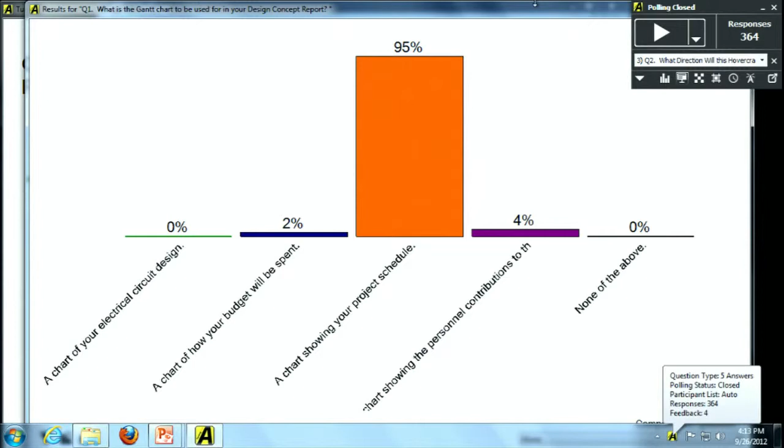Okay, first clicker question of the day. So, once again, to try to reward those who have actually been reviewing the notes from the previous lecture. What is a Gantt chart for? More particularly, how are you expected to use it in your design concept report, which is going to be due pretty soon? Yes. Yeah, I'll say that out loud. Okay, couple seconds left. All right, good. Wow, it was either easy or everyone reviewed.

Okay, so just to reiterate, a Gantt chart is actually a pretty powerful tool, and in the fields of engineering you are most likely going to be using more Gantt charts than you know what to do with. Most modern industry and businesses use Gantt charts to help projects stay on track. They help plan not only where the effort is going, but you can also make the Gantt charts much more complicated, where it's not only human resources that are tracked, it's financial resources, it's access to testing facilities and things like that. And it helps an organization stay on track as best as they can.

So there are much more sophisticated tools to make Gantt charts than you're going to use in this class. Most of you are probably going to use Microsoft Excel to make Gantt charts. And I put a couple videos on the website that'll walk you through how to do that in different versions of Excel. And you can find many more on YouTube. But if you're really interested in learning how to do this well, and you might do this by the time you get to your senior design projects, there's a software package called Microsoft Project that specializes in making really detailed Gantt charts that you can take a look at.

We don't expect that you use that in this course, but everyone in the College of Engineering has access to free copies of a lot of Microsoft software. I mentioned that several weeks ago. Microsoft Project is one of them. It's like a $500 software package. You guys can get it for free. You can check out the instructions that I sent out in a course announcement maybe 3-4 weeks ago. And it's got a little bit of a learning curve, but it's quite powerful.

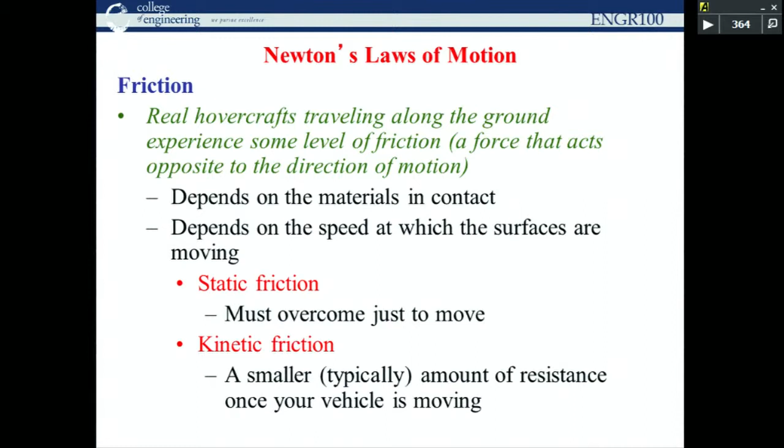And these are phenomena, issues that you're going to have to deal with when you're working on your control system. Friction can be good and friction can be bad. It all depends on what part of your system you're trying to deal with it. So you as a team have to figure out how serious it is. Is it really a problem? And in some cases, it might actually be desirable.

Because we don't allow you to use flexible skirts, it's probably not going to be a big problem as long as you're actually hovering. Probably not going to be a big problem on dragging on the ground. If you're dragging on the ground, you're disqualified, right? So obviously, you have to design around that whole situation.

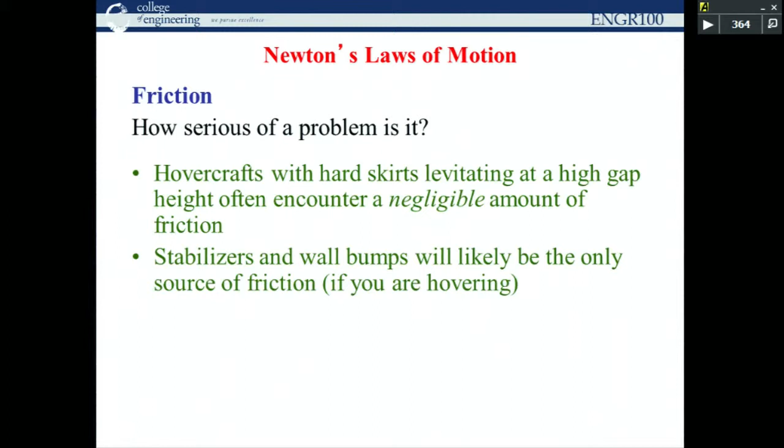Okay? The only way you're going to be able to figure out whether you have a friction issue anywhere on your hovercraft, on the top, dragging on the bottom, with your wheels, or if you have wheels to help keep you tracking in a straight line, is by testing it. And you won't be able to do this until you have something to test. So you have to build something, get yourself started, and get a feel for how much friction you actually have in your own hovercraft.

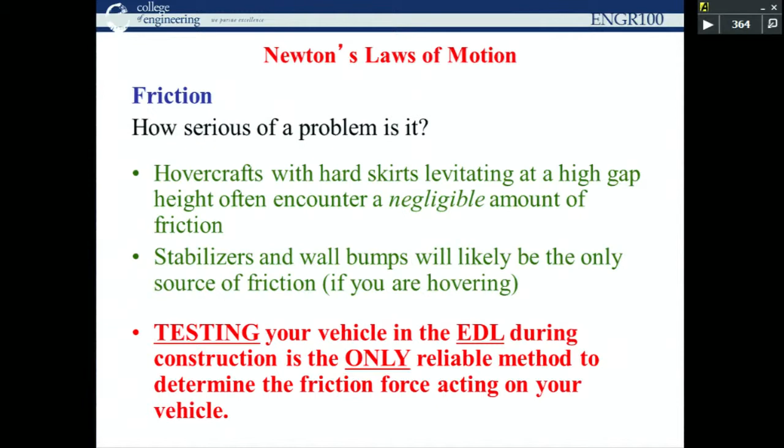Some hovercrafts, this is a zero issue. And in other people's hovercrafts, because of the design that they chose, they did have to spend quite a bit of energy or time thinking about how they're going to solve these problems.

Other classical problems we typically have are spinning. Now, this isn't a physics class, but you might imagine if you have a hovercraft here with fans that are pointing straight down, the moment you turn those fans on, they're going to start rotating, right? And if this thing is hovering, there's essentially no friction between your hovercraft and the ground. And you have a rotating fan on it.

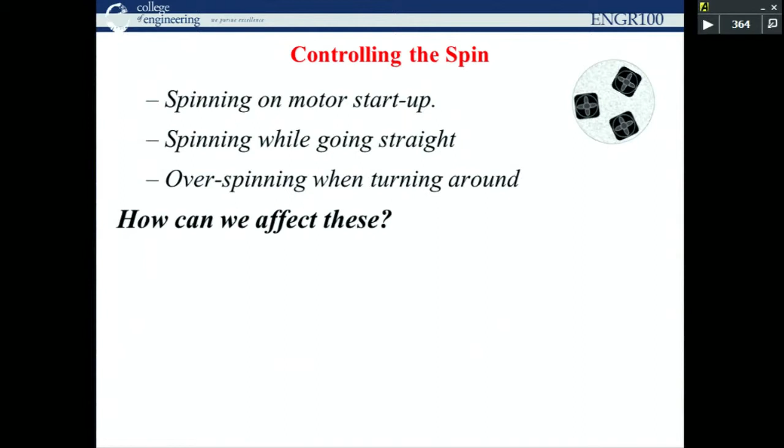What's going to happen is while the fan starts to turn clockwise, the whole rest of the hovercraft is going to want to turn counterclockwise, right? This is Newton's laws applied in an angular momentum sense. So the spinning of hovercrafts is a big issue that you have to come to some sort of a solution for. And how you achieve this is going to vary from team to team. Some teams will buy special fans that actually have two parts that rotate in opposite directions. So in other words, they have two fans stacked one on top of each other.

You have to look for these carefully if you want to buy them. The top fan rotates counterclockwise, the bottom one rotates in the opposite direction, and they cancel each other out, and the rest of the hovercraft doesn't rotate at all. Okay? Some fancy helicopters use these types of stabilization techniques. Most of them use tail rotors, but some helicopters will do this kind of a thing.

It is a particularly big problem if your hovercraft develops spin. It doesn't even have to be anywhere near this much spin. It only needs a little bit of spin because you're driving down this course that takes you 10 seconds to go down, right? And if you only have a slight spin, as you go down the field, suddenly your tail is spinning out, right? And you no longer are driving in a straight line down the course. Now you're driving into the sidewall. And once you hit that sidewall, then there's friction. And that friction gets you spinning really big time, okay?

These are fairly significant challenges. You don't want to spin. Some of you might have designs that go down to the other end of the field and then do a 180 and then drive back in the other direction. Then spinning is actually desirable if that's your design, okay? But you want to make sure you turn 180 degrees and not 160 degrees, right? Or 140 degrees or whatever.

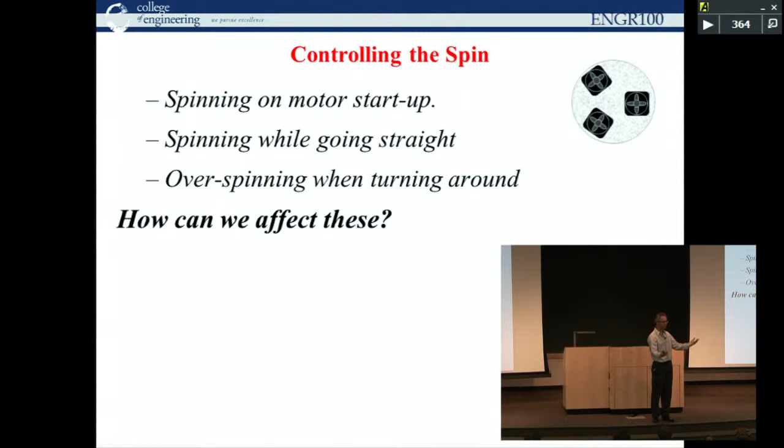The things that you can do to help address the spinning, either to cancel it out so that you don't have any, or to take advantage of it because you need it to actually turn around and go in the other direction, are everything from the balance of your overall hovercraft; where the fans are placed and how many you have can sometimes influence it. If you have one, it's easy to put it on the center line. If you've got 3 or 4 fans, you might need to find the sweet spots where you put them so that it's not only balanced for the mass, but it's also set up in a way that the moments, and when you take dynamics, you'll learn about the details of this, but the moments created by the fans are all equidistant from the center of rotation of your system, and hopefully can cancel each other out.

Right? The venting of the air underneath your plenum chamber can influence spinning. If you're not careful, it can be in a little exhaust port that gets you spinning really good, like a pinwheel. All right? Let's see here. Stabilizers, steering fans. These are other, a little bit more exotic. Most people use these approaches to actually manage their spin. Some people will put rotors on the back end that help stabilize them, but that's a pretty complicated solution. They basically make their hovercraft stabilize the way a helicopter gets stabilized.

I don't know if you ever thought about the complexities of a helicopter, but if they didn't have the tail rotor here, the rotation of the main rotors would cause a reaction of the whole body of the helicopter to rotate in the opposite direction. And that's a pretty sure way to get really dizzy and then die. So they put a tail rotor on the back end that causes the rear end to get pulled in the direction that's opposite to the direction that the main rotor wants to force the whole thing to rotate. Okay? It's a fairly delicate balance. You have to make sure that your tail rotor is turning at just the right speed.

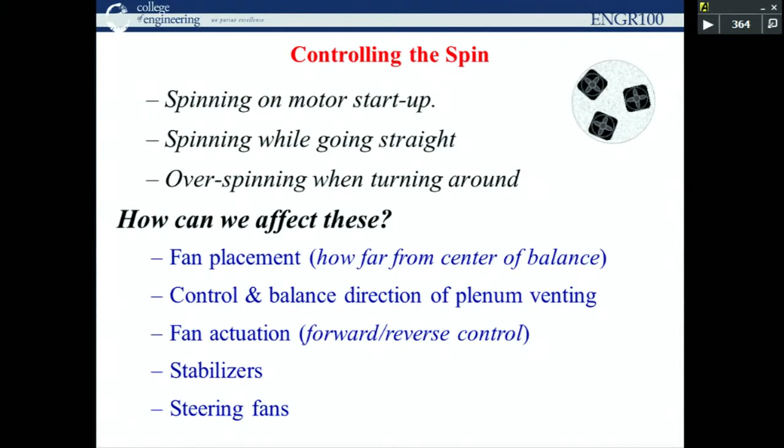Ducting sometimes can do that. The biggest problems you're going to have are when your fans are pointing straight down underneath your hovercraft. Okay? That's the biggest problem for spinning, I should say. Another approach is to have that fan pointing sideways, but use ducting to redirect that air to go down underneath you. You might be able to reduce the effects that you get because of the rotational moments that get set up in this system. So a lot of different techniques. You might even just use stabilizers on the ground that add enough friction so it doesn't spin.

Question, straight up back.

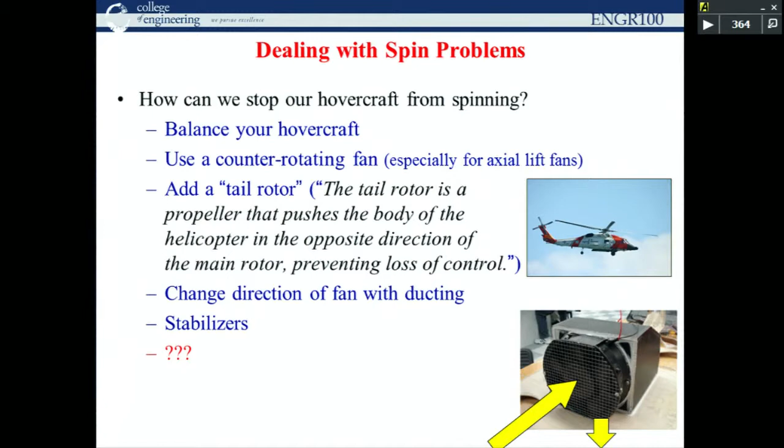The question is, if you use an axial versus centrifugal fan, do you get the same issues? The short answer is you can. It will depend on the orientation that the fan is mounted in and everything. Basically, if the rotation axis of the fan, and I guess also the motor in the fan, they're not always the same thing, is lined up in the vertical axis of your system, you tend to run into some trouble.

Obviously, balance of everything should be good. We talked a little bit about this earlier, maybe a week or two ago. I can tell you that the first thing you're going to want to do in your design process is get the darn thing balanced. In fact, I think it's checkpoint 2, where you have to have something built and hovering in place. Maybe it's checkpoint 3. You have to have it hovering in place. Namely, you have to have it balanced.

This is going to be a recurring problem for you throughout the whole semester, because every time you make a little change to your hovercraft, you're going to throw off the balance. On Monday, you assembled it, you put your battery pack here. On Wednesday, when you met again as a team to work on it, the battery pack was off by 3 millimeters, and suddenly it's no longer balanced. Meaning that it's swerving, it's not hovering even, it's dragging an edge.

You probably want to think about a design in which it's easy to balance on the spot, right? It's kind of like calibrating it, setting the gun sights before you go to the range. Let's put it this way, you don't want to epoxy everything down onto your plenum, onto your platform. You don't want to make it permanent. You want to have some adjustability to it.

And what we typically see is they'll put all their major components on board, and then they'll have ballast. They allowed for an extra 6 ounces, whatever, in their design, that they will put someplace on their hovercraft to get it balanced. But they included that in their mass budget and in their calculations. And they don't know where it's going to end up on any given day. Probably it's not going to wander too much, but it will probably not be in exactly the same spot.

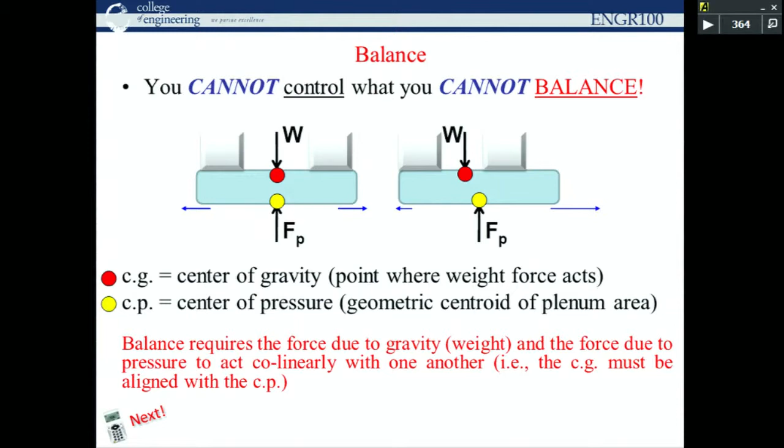This situation here would not be balanced, where the center of your weights is not lined up directly above the center of your pressure that's acting in the upward direction. That's what's lifting you. So this is one way you can sort of visualize it. This sketch, we call this a free body diagram. And those of you who go into most of the fields of engineering will be learning about this when you take statics. You might cover it a little bit also in physics.

Okay, so I asked a similar question a few days ago, testing your intuition, but we've talked a little bit more about it now. What direction is this hovercraft going to drift? Or is it going to drift at all? So this is a simple square, and I've drawn dashed lines to outline where the center of the square is. That's the footprint of the hovercraft, the plenum chamber.

Hurry up. 5 seconds.

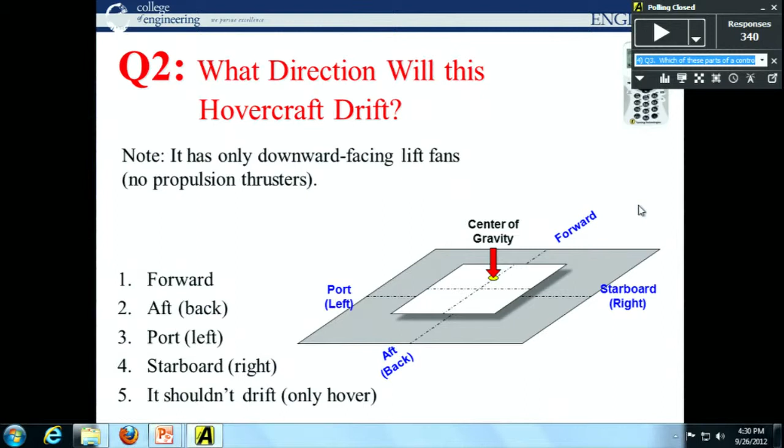All right. So the answer is that it's going to move in the forward direction. Recall, we talked about this briefly a few lectures ago. Recall this little sketch that I gave, where we have a hovercraft with some kind of a weight located on it. Ideally, when everything's balanced, you're going to have equal airflow going out all sides of the hovercraft, and all these airflows are going to cancel each other out, essentially,

and it's just going to hover in place. But if we shift that mass to the side, we're going to tilt the hovercraft a little bit. The gap height on the left is going to be a little bit smaller, maybe a lot smaller, than the gap height on the right, causing more air to go out the right. We're effectively creating more of a jet effect coming out the right that's going to push everything over towards the left. This is a phenomenon that a lot of people take advantage of with their hovercrafts, but you still have to know what this center balance location is, right?

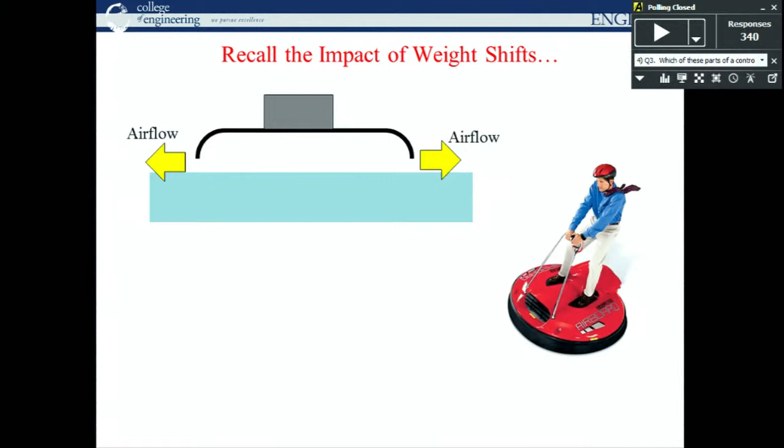Because you're going to have to be able to show us that your hovercraft can hover in place if we ask it to. During the actual competition, it has to be able to go in a straight line, so you don't want it hovering left or right, but maybe you intentionally want it to hover in the forward direction. That might be a good thing. But when you get to the far end of the field, you have to turn around and come back in the other direction. So you have to be able to control these types of effects. Sometimes you can do it through weight shifts, and other teams are going to use more sophisticated techniques to do that.

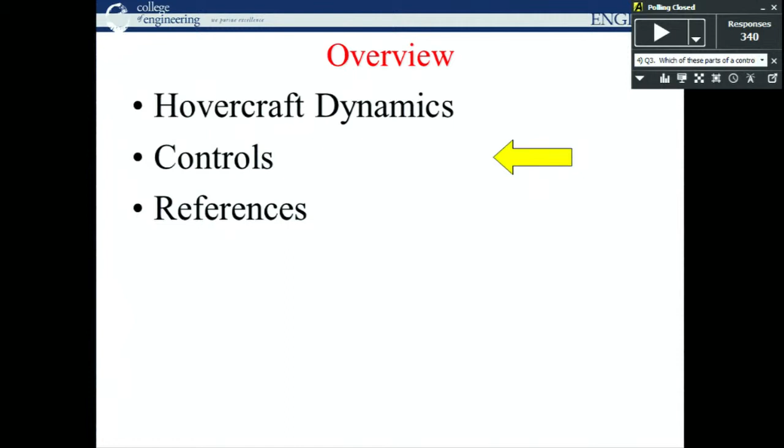Okay, controls. Controls, as I was hinting at before, is a fairly complicated subject matter. You can have all sorts of different types of controls. But for these hovercrafts, we're going to talk about some fairly specific things that you probably are going to want to care about. In this class, we have an autonomous system. So we're controlling it, but not with a human. That's what the autonomous part means. You have to be able to make a system that either controls itself mechanically or electrically, namely with some sort of a computer that will allow you to do the actual controlling.

So, control systems are varied. There's many, many different types. There are open loop, there are closed loops. There's all sorts of different techniques that we generally cover in more advanced courses. But for this class, the control systems you're going to be using are actually a little bit advanced. We're not going to worry about the theory and all that stuff. But you're going to be making a full feedback control system, probably controlled using a small microprocessor. You're going to be using sensors, motors or actuators, all sorts of things, maybe relays in this case here.

So we have to look at our hovercrafts as a system that is controllable, meaning that it's not something that's just going to work at random, where you need to be able to exert some kind of influence over it, or maybe have the computer exert that. You're controlling the computer, and the computer's controlling the actual hovercraft. Typically we're using sensors to detect where the ground is. Maybe you don't really care where the ground is, but you want to know what color the ground is, because the different parts of our competition board are either white or black, or silver actually in some cases.

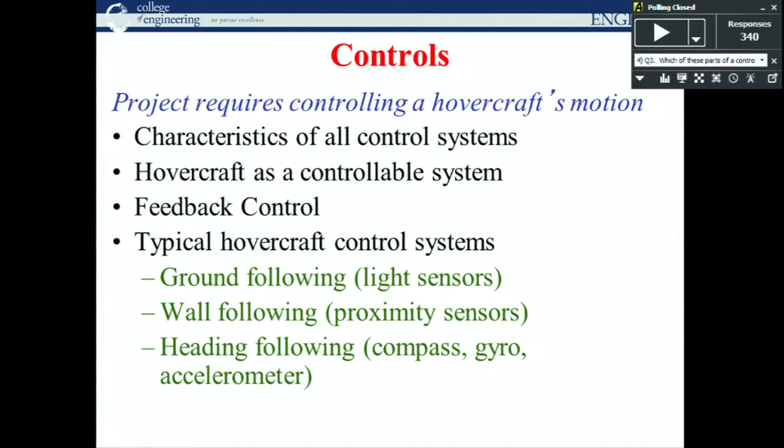Okay? So being able to detect where the walls are is sometimes a good thing. You don't necessarily need to have a GPS or compasses and things like that. Not for this assignment, but that's a big issue in other types of projects. Okay, quick video here. Let's see.

This is a cat studying to become a controls engineer. My cat just simply unrolls all the toilet paper. But this cat sits there and plays for 10 minutes, flushing the toilet over and over and over. So quite curious about the way things work.

But one thing this cat, Fluffy, realized was that the toilet always had the water come back, and it never overflows. Right? This is a very elegant example of a, I don't even know how old this particular design is, a very old design of a control system. Okay? It is a mechanical control system. I don't want to give you guys the impression that control systems have to have computers and electronics and all sorts of stuff. A simple low-tech toilet is a very elegant example of a mechanically actuated and mechanically sensed and mechanically controlled device.

And we have lots of them. Cars are really good examples. Lots of the things that you have in a car are mechanically governed. Okay? So open your mind, so to speak. As modern engineers, we think, just throw an electronic circuit at it. It'll solve everything. And you can get electronic toilets. I'll show you a picture in a little bit.

Right? Not necessarily the easiest or even the lowest cost or even the best things to do, but we tend to use controls as electronics nowadays. Perhaps not always a good thing. So a control system, and I'm using more lofty engineering language here, so bear with me. A question up front. So just a quick question. You were

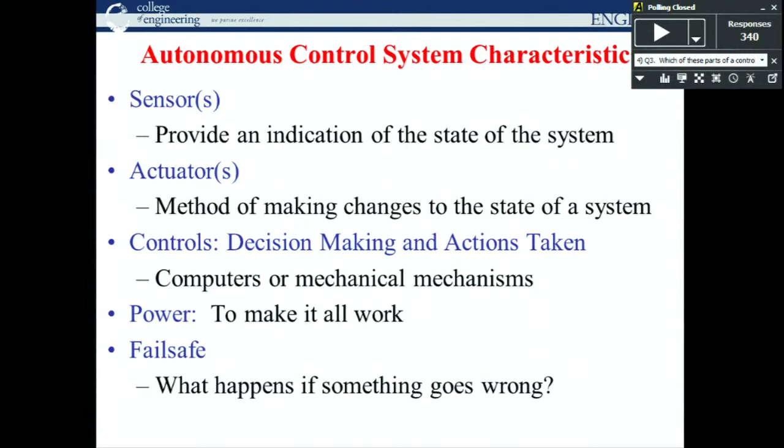Okay, so I've been alluding to the toilets. This is a good question for engineers. Raise your hand if you have taken off the lid from the back of your toilet at some point in your life and looked in there to try to figure out why the damn thing won't stop flowing. All right, okay. You're going to be engineers. You're on the right track. Raise your hand if you actually figured it out. Good. It's an elegant and somewhat sophisticated device here.

Now, this isn't Toilets 101. You can YouTube that. But the idea here is that you have a tank full of water. I'll caveat that there are a lot of different toilet designs. This is the one that's most common in the United States, at least, where you have a water tank that holds water above the rest of the tank, so you get some hydrostatic head, and you have potential energy from all this 5 gallons of water being located about 1 or 2 feet above the business end of the toilet.

So when you push on the lever, or when your cat pushes on the lever, it lifts up this little plunger valve down here that opens up this opening right there. Water starts dumping down through that. It flows through the rest of the toilet. It creates a siphoning effect that draws the water out of the bowl and everything with it. And it's a fairly elegant solution to get the flushing action that gets a lot of water all moving at once and to take away all the stuff that you want to go away.

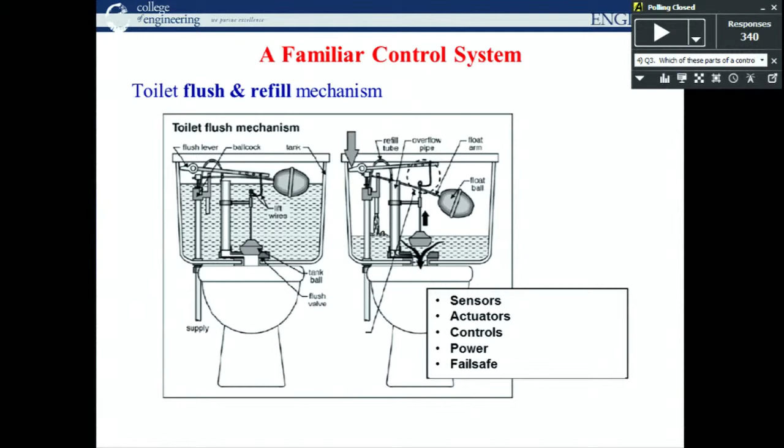Yeah, that was implied when I said that you have a water pressure in your supply water. That came ultimately from a pump, usually, but sometimes not. It might just be that it's coming from a reservoir that's located 600 feet above your house, right? And then you don't even need a pump. Yep. But you're thinking, right, there are lots of ways that you can get energy into this system.

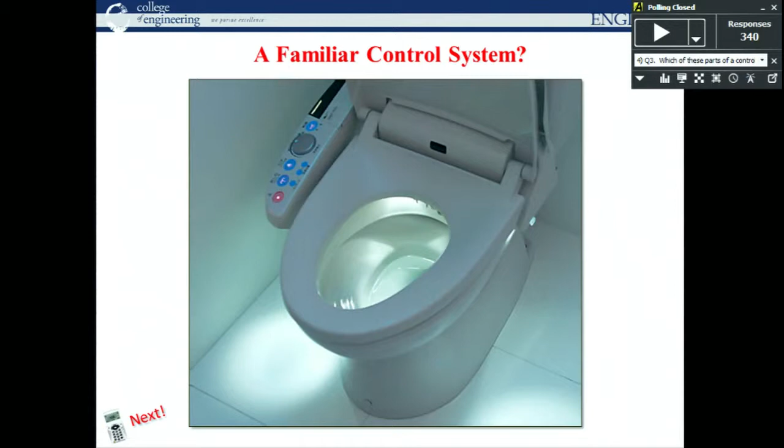Okay. Does an elevator have a control system? So think about our definition of a control system. Are all of these things present in one form or another in an elevator? All right, clicker question. All right, we're running short on time here. All right, good.

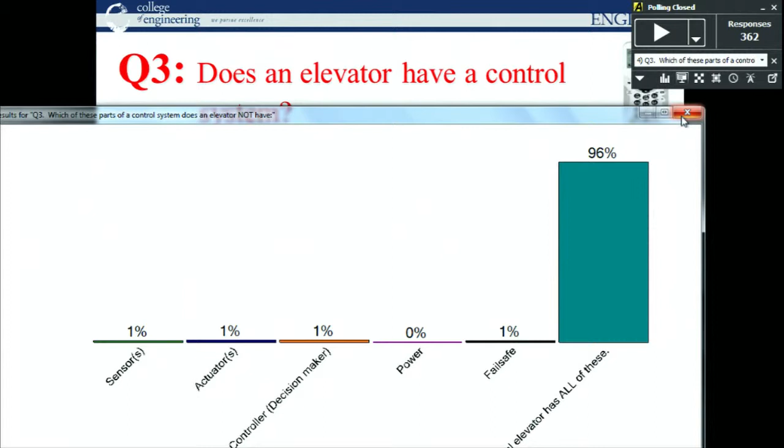The controller in an elevator is usually making decisions because they usually have sensors in them to tell them what floor they're at, right? Have they reached the floor? If you've ever been in an elevator where it opened like a foot above the floor or below it, something's wrong with the sensor or with the control system, maybe with the actuator, right? So elevators are generally going to have all of these things.

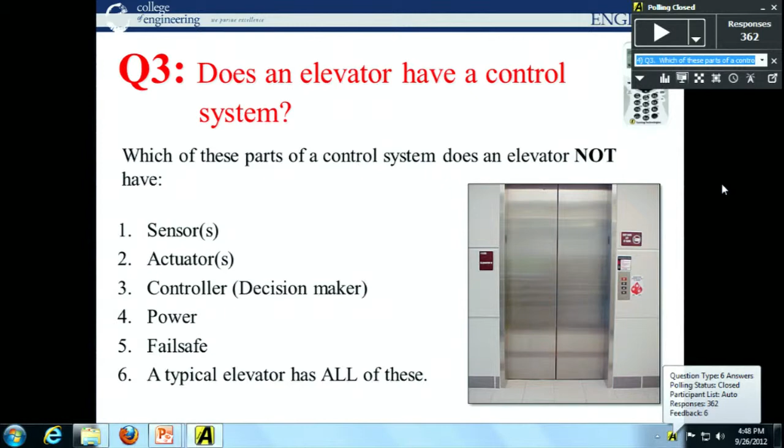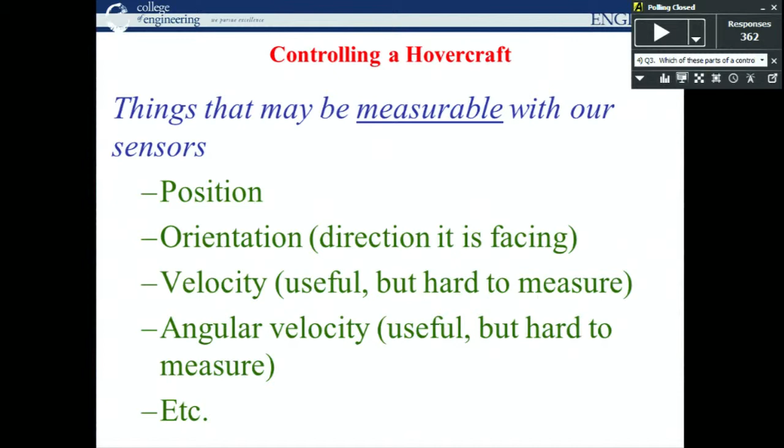In our case here, we have a hovercraft that we want to be able to control, all right? We have to pause and think about what things we stand a chance of actually doing anything about with a hovercraft, right? We have things like the position to be worried about, what direction we're pointing. You might be interested in knowing how fast you're going, because if you're going really fast and about to hit the back wall, that's good to know. Are you rotating? How fast are you rotating? All of these things are important.

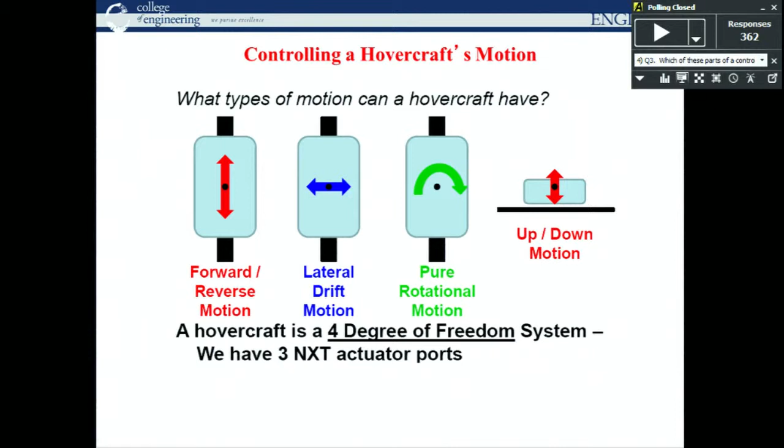Hovercrafts have 4 degrees of freedom. Right, guys, we're almost done for today, but please bear with me. Forward, reverse, left, right, up, down, and rotation. These are all the 4 different degrees of freedom that you have. And you have to decide as a team which ones you should be caring about. Right? The up-down direction, you might not really care about that so much. That's up to you. Maybe you do. There's a good reason to care about this, but not everyone does.

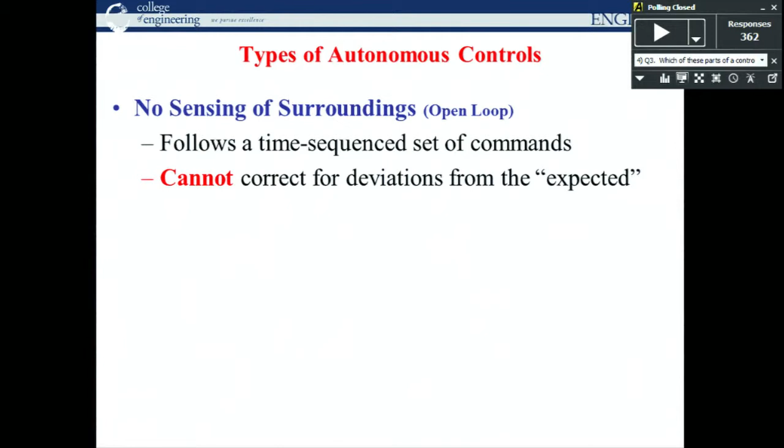Okay? In our case here, there's 2 different types of control systems that we typically work with. We have open loop and we have closed loop. Open loop systems have no sensing, essentially. They usually operate based on timers. You can use a timer in principle to do this hovercraft assignment, but that's pretty tough. We call it dead reckoning, where it knows when to turn around based on how many seconds have passed. And if anything goes wrong at all, like you just bump the wall slightly, it's probably going to throw things off.

That's kind of like walking across campus in the middle of the night with a blindfold on, or me trying to walk off this stage with my eyes closed, getting instructions from somebody who says, okay, walk forward for 1.5 seconds and then step down. Well, if I get that even just a little bit wrong, you guys can laugh. Right? You guys are going to have a feedback system.

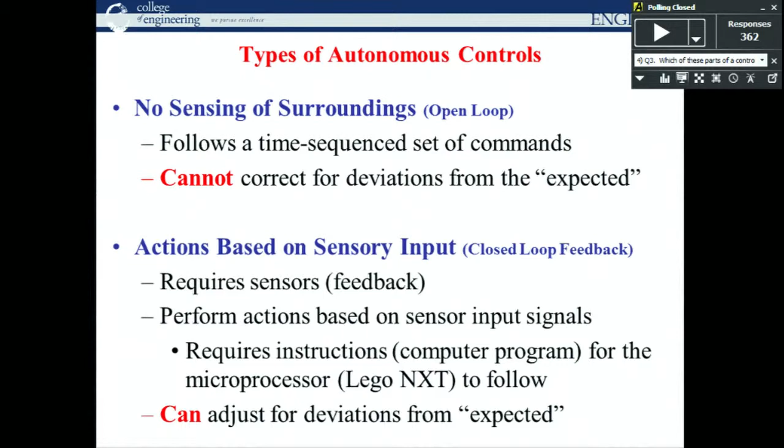You're going to have sensory input, and you have to figure out which things you want, what types of things you can sense. When we talk about the Legos in a little more than a few weeks, you're going to see what types of sensors you have available. And you really have to make some hard decisions about how complicated you want your system to be. So at the beginning of class next week, we'll give you a couple illustrations to show you how complicated it can get. But until then, keep up the work. All right.